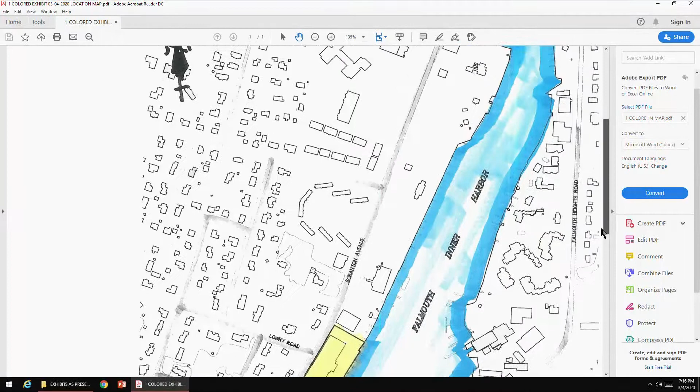So what I propose to do is go through the exhibits, because that's the best way to describe the work that's being proposed. It's rather an extensive project, basically rebuilding the waterfront at the Falmouth Marine and Yachting Center. The first exhibit shows a map of all of Falmouth Inner Harbor, and this is the location of the project we're proposing to do the work. It's owned by Falmouth Holdings Company, called Falmouth Marine and Yachting. So the notice of intent is extensive, so the first thing we ought to do is

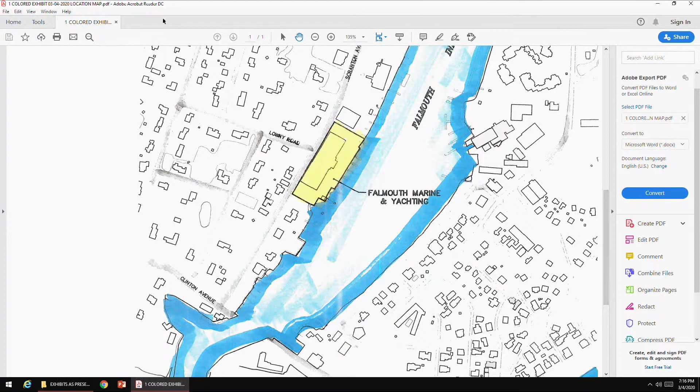look at the existing conditions. Scranton Avenue is on the top. North is generally... this one doesn't seem to have a north arrow, but all the others will. This is Falmouth Inner Harbor. So what exists today is a very long building, the main building. There's a projection and there's stairs, there's very large doors here. There's paved parking, there's a paved driveway, there's shell parking on this side.

There's a concrete pad that's underneath some shells and gravel, then there's shell parking all the way around. Along the waterfront, there's an existing pier and float, then there's a float system with a bunch of dinghies stacked on it. There's the ticket office, there's a substantial pier including a large crane, then there's the travel lift pier with two arms. There's a ferry service that goes out to Martha's Vineyard that ties up here, and then there's a fixed pier here, a fixed pier here, and then floats.

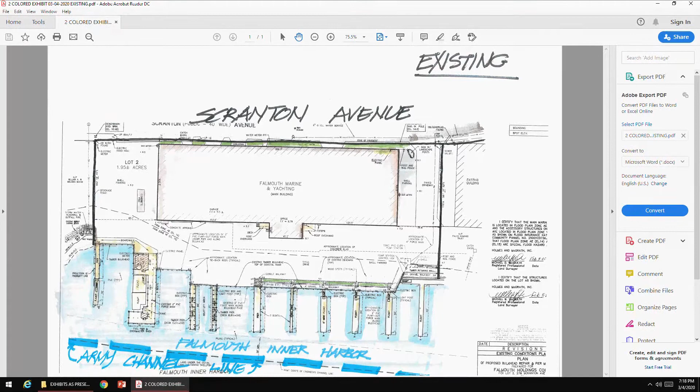And while we're replacing it, there's this old timber bulkhead, and we're going to do work on the proposed timber bulkhead. So what I've done now is I have another exhibit that shows the proposed work.

What we're doing is we originally filed a slightly different plan, and the harbor master asked us to move certain of the float extensions at the north end back. So this is a revised plan that shows them being revised, so they all line up.

Before, they were coming very close to the Corps of Engineers 30-foot offset. The Corps of Engineers dredges this, and when they dredge it, they have established a channel line, and says no new structures can lie within 30 feet of it. So the harbor master has given a positive referral, and asked that it be conditioned that no tied-up boat projects into within 30 feet of the channel line, which is a suitable condition.

So this is the proposed work, and we are reconfiguring the floats. I'll show you a graphic that shows we're decreasing the amount of floats and structures in the water, even though we're adding a slip.

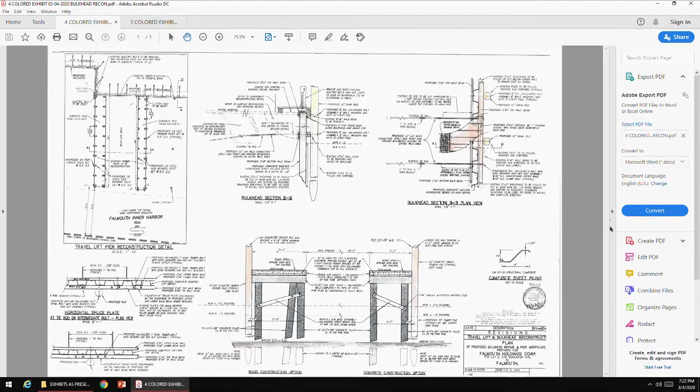So we'll talk some more about these issues when we look at the future work.

This is another cross-section. I talked about the drainage. When you build any project that involves a commercial site, you have to publish a stormwater management plan, and we've published one. As I said, this is the new vinyl sheeting, this is the new walkway that's going to be constructed, and landward there's going to be basically a gravel trench with some sand in it, a special, well, it's basically Title V sand.

Then there's another collection layer, and we show that every 20 feet or so there's a 4-inch pipe going out. So the proposal is that surface water comes in here, gets filtered out so we remove total suspended solids and things like that, and then the water would be discharged over the side into the harbor.

Now, there is a wash pad on site. What's a wash pad? I'm sorry.

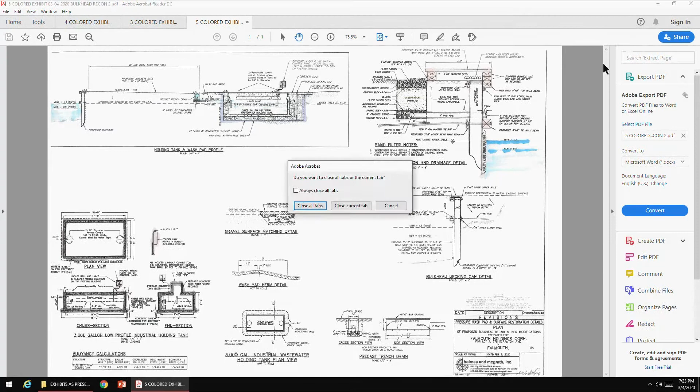DEP has now published standards for work. Let me go back to this -- when you have a travel lift now, you're supposed to install a drainage system. The drainage system here is that there is a reinforced concrete pad.

It's constructed such that all the runoff that falls off the boat goes into a trench grate located right in here. The trench grate is connected to a shallow, basically sealed tank. We have identified the size as a shallow 3,000-gallon industrial wastewater holding tank.

So what happens is the water comes in and fills this tank up. The department requires that this be taken and disposed of at a treatment plant. Whenever it reaches a certain level, they will call and get it pumped. These manholes will be sealed during rainstorms, so we're not pumping rain. So there's the details of the industrial holding tank we have to put in.

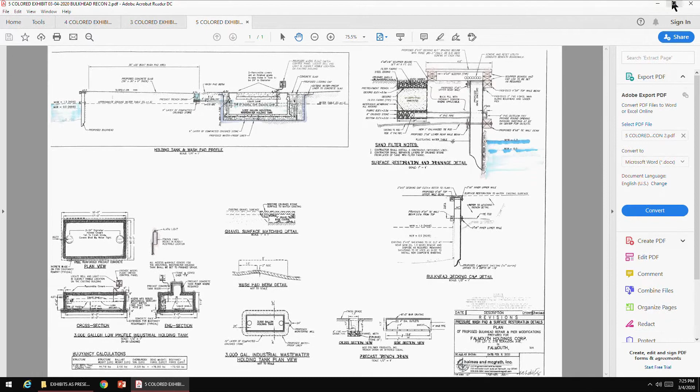And this is the wash pad I described. This is the walkway I described, and it goes all the way along. There was a ticket office that was used before, and now it's going to be built in this location. This is a brand-new structure.

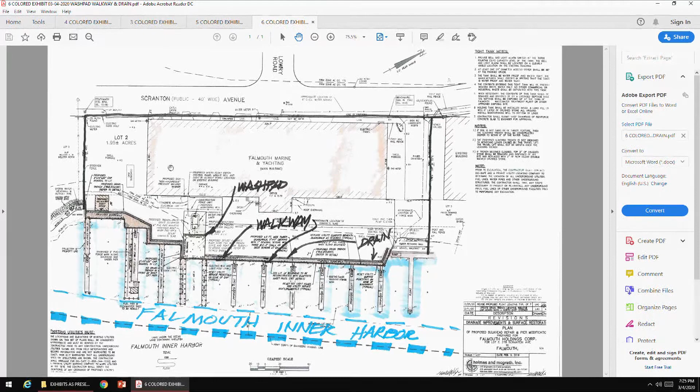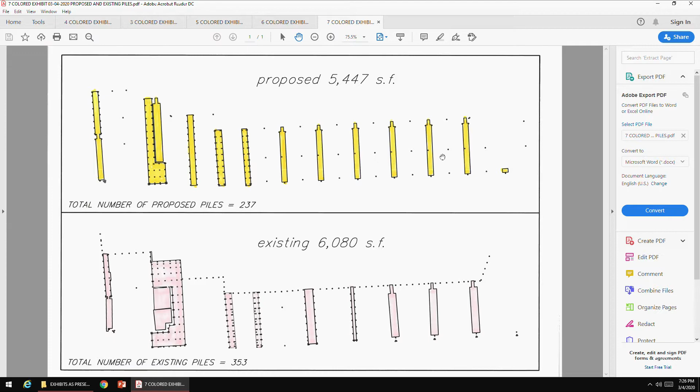We do have one additional slip that's going to pay for all of this. It's quite an expense for this facility, which is quite old, to say the least. We did file a stormwater management plan with the commission that describes how we meet the state standard. So I believe this is a suitable project that can be readily approved by the commission, and I'm ready to answer any questions you might have concerning the design. Thank you.

Mike, what are the differences between the 2008 approval you got for the same project and now?

Well, remember the reconfigurations of the floats. The first thing is that the 2008 approval is long expired. In 2008 it was said that as long as we reduced the footprint and reduced the piles, it was a suitable project, and there was an improvement in the material of the pilings, because the piles out there are basically the old ones that have creosote in them, not tar, but an asphalt-type creosote.

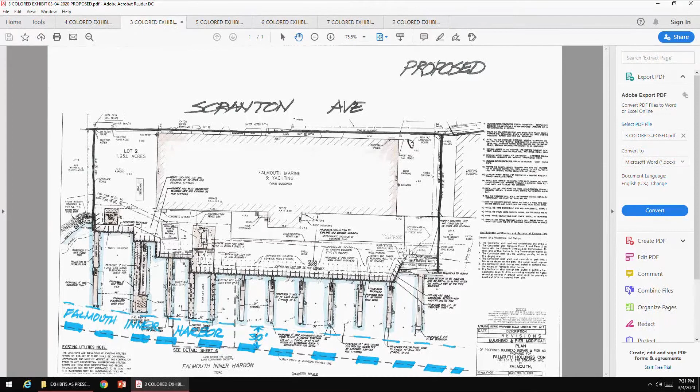Courtney asked: the existing tie rods are connected to dead men? Yes. Where are those located? If you look at this graphic, it shows the approximate location of the existing dead men, taken from the license plan. The dead men are a substantial distance back, nominally over 20 feet, though setback depends on the depth.

Are the tie rods in good condition going back to them? If they're not in good condition and the contractor tells us, we will have to install a new tie rod from the bulkhead back to the dead man. Okay, I have no other questions.

Kevin asked: I'm sure there'll be some restrictions while you're under construction, so that you're not just protecting the harbor, but you're protecting Scranton Ave. There's a time of year restriction anyway, but you're also going to have comments on the fact that there should be some drainage out in Scranton Ave, and you don't want the construction to be affecting the drains out there.

If you look at the plan, there's a construction limit fence in good condition. So are you saying we need to put something on the catch basins? I think you're gonna get a comment on that. Well, there's no question that when we file for building permit, there's another review that occurs. I mean, it has a limit of work.

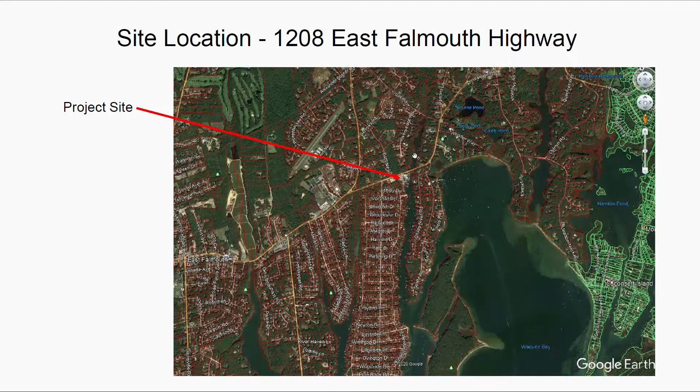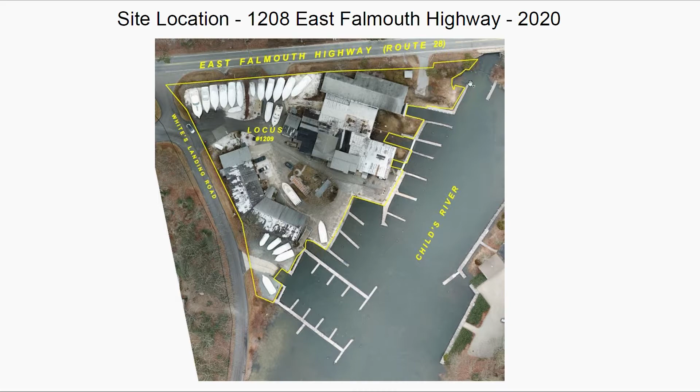You see from the yellow outline, that is the actual parcel. On this parcel we have a series of very large buildings. You'll see in this area here, that's all one building that's been added onto over the years. There's also another large building over in this area, with various improvements throughout the site. And you see all of the dockage out here - these are all the docks owned and operated by Bosun's.

Existing conditions for the site in your resource areas are land under the ocean, land containing shellfish. We did not do a shellfish study on this area - we're presuming that shellfish is in this area. This area is closed to shellfishing, and the project has been reviewed by the Shellfish Constable.

Also, there is a salt marsh area - if you look at my mouse here, you see there's actually two little salt marsh shelves right here. Those shelves were a condition of a previous permit, and those are existing salt marsh areas today with the appropriate buffer zones to them. Also on this site are coastal banks - there's a coastal bank along East Falmouth Highway that cuts across the street in that area. All of the buffer zones are shown on the plan in green as buffer zones A and B under your regulations.

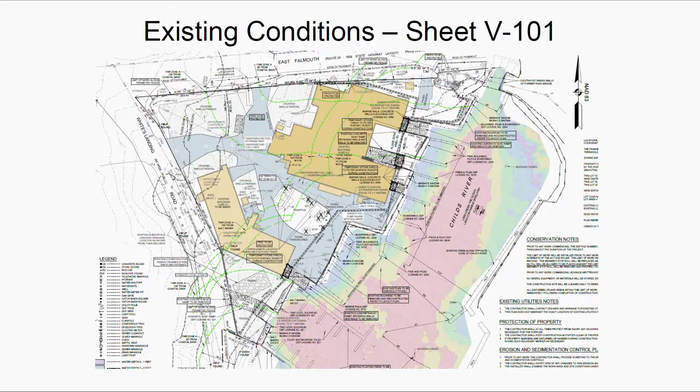Also, a large portion of the site is within land subject to coastal storm flowage. You see here's the flood zone boundary in this area here. And that covers it for the resource areas. Oh, this is also a fish run. I knew there was another.

Just some quick project statistics before we get into the plans. The area of existing buildings - we have 28,000 square feet of building area. We're gonna drop that down to 6,000 square feet. A serious reduction in building area.

We have existing 48 slips, 2 moorings. We're gonna be going to 49 slips and removing the 2 functioning moorings. The existing pile count's 353. When this is done, there'll be a reduction to 237.

Your net change in your buffer zone areas, your net change in development within the buffer zone areas is gonna be a negative 6,700 square feet, and I'll show you how we get there. We're actually gonna create new resource area here - new area of land under the ocean, 4,000 square feet of that area, and we're gonna be relocating the salt marsh areas that exist.

The proposed project includes the commercial building located in the center, surrounded by parking areas with various improvements along the shoreline and complete reconfiguration of all the docks. Also, as part of this proposal is dredging, and I'm going to go through each step.

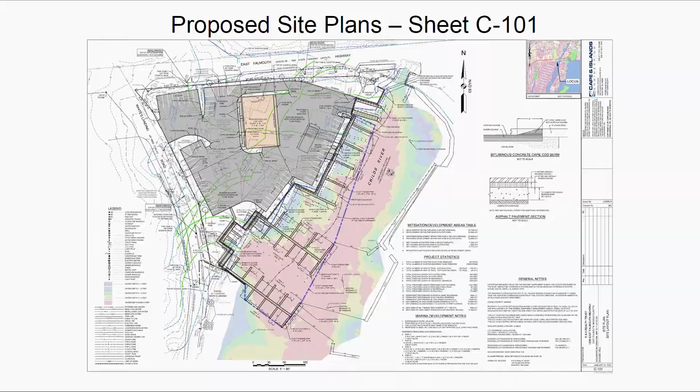For our upland site work, we're going to be constructing the new building and the new parking area. There will be a wash pad here. This wash pad will have a recycling system that will function to capture and recycle the wastewater, which will then be removed from the site as necessary. It's the same type of system that Bosun's uses at their other sites, and this is very similar. We're in the middle of construction at the Mashpee Neck Marina, and this is a very similar setup that's being used over there.

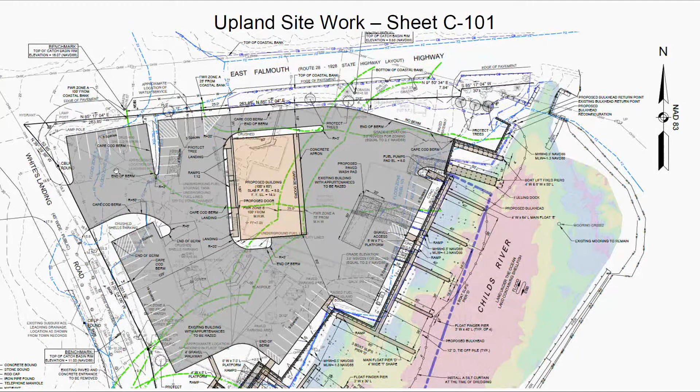The entire parking lot will be rebuilt. We're gonna grade this parking lot so that we catch all the runoff from it. And once we get to the stormwater management plan, we'll show you how we're dealing with some runoff that's coming from East Falmouth Highway. We're gonna utilize the existing leach pits that are up in this area, and we'll be connecting to those and installing new septic tanks.

For our shoreline work, we're going to rebuild all of the bulkheads and change the shoreline. I have another plan that clearly exhibits that for you. But in this case, we're gonna be doing all new bulkheads along the complete shoreline of the marina, and then a series of fixed piers and floating piers installed along with those or afterwards. There will also be a travel lift installed over in this area.

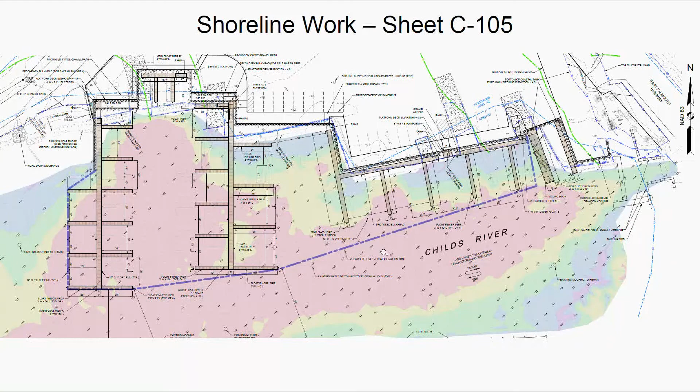One thing I didn't point out is if you look on our site plan, you'll see the bathymetric survey that was done, and it's color coded so you can see where the depths are. Those depths are all based from mean low water. There are various details on the plans with specifics on the bulkheads and things like that, and I'm not gonna get into the details, but if you have any particular questions about them at the end, we can go over those.

This plan right here shows some of our site utility layout. You can see first that the building's being connected to a septic tank and a pump chamber that would then be pumped up and leached into the existing leach pits.

We have a series of drainage structures on the site that will capture both roof runoff from the structure and runoff from the pavement in the front of the site. And in this back portion of the site, we're gonna slope the entire site over into a drainage swale, and that drainage swale will have an overflow for when necessary, where it would discharge into Childs River.

Right now, just about the entire site discharges into Childs River. Also, we have a large amount of stormwater that actually comes off of Route 28. We have started discussions, and we're gonna be trying to work with Mass Highway to get them to make some improvements there. But in our design, we're planning on those improvements not happening for a long time.

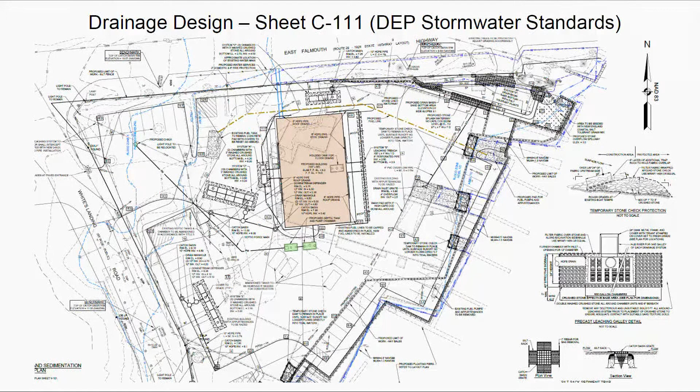This drainage swale is gonna act both to capture the stormwater and treat it prior to discharge, and act as a reserve capacity, so there is a standing water level in there. The water level will be able to rise in hopes that we'll get as much leaching through the drainage swale as possible and reduce the amount that needs to spill into Childs River. In any event, all stormwater that would enter Childs River will now be pre-treated, which is a significant improvement from the existing conditions. This design is in accordance with DEP stormwater management standards.

When we complete all of the work, we'll be landscaping the site. There's gonna be an area along the highway where we're gonna landscape with native grasses. It's an area highly exposed to a lot of debris coming off the highway. The grasses do really well for stabilizing the sides of highways, and there's a pretty good slope there too, so native grasses are a really good fit for this area. We're gonna put a couple of native trees over there as well.

We're gonna be using a New England coastal salt-tolerant grass mix for the drainage swale, and a mixture of grasses and a native thorny shrub that will run all along the edge of the parking. That will act as a stabilizer for the slope, since there was a slope transition there, and the thorny shrub we chose will hopefully discourage people from cutting through in those areas.

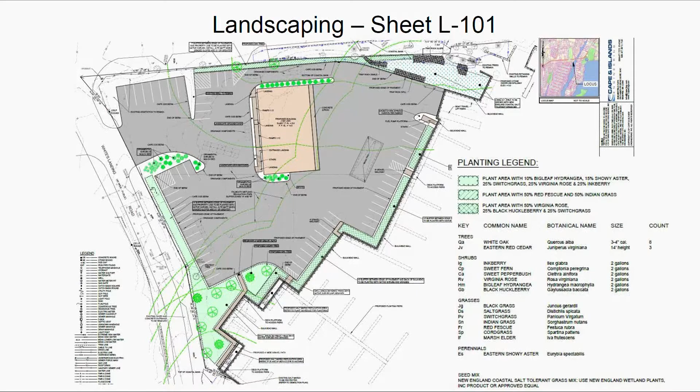Over in this area of the site, we're gonna replant with native shrubs. Mixtures are all called out on the plan, along with native trees, and we'll carry that up along the property line in this area here.

We believe the project exceeds all applicable performance standards, as we have articulated in our narrative.

The existing site is located within a marine zone district. It's been historically used as a marina for many years. It has all the appropriate permits in place, and is in need of repair. I think if you've been to the site, you'll see that it's far from its former glory, and it's time to do something.

The project, when completed, is gonna have a net reduction in developed areas. It's gonna have major improvements to stormwater management, an increase in resource areas, an increase in natural vegetation, and an improvement to navigation. So this is really a win-win.

So with that, we respectfully request you would issue an order of conditions, and we're available to answer any of your questions. Thank you.

Yeah, a couple of things, Matt. You're redoing your whole bulkheads, right? Obviously. Are you going in front, or just reconstructing the whole front? Are you reusing any of the bulkheads, or are they all gonna come out? They're all gonna come out.

Okay, when's the last time the site was dredged like that? Do you know the last time? There's a project, I don't have it off the top of my head, but there's a section in our narrative for project history, and that should be listed there. It shows all of the permits. I was just trying to find that real quick, I never read it. Okay, exhibit six has a history page.

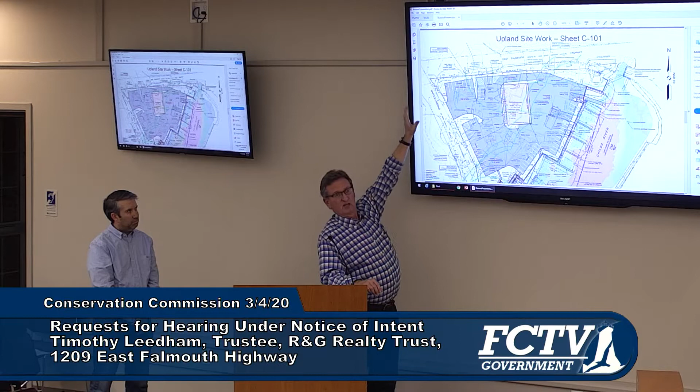So we've already gone over, and this is all completed. As part of that, if you were out to the property, you'll see that there's new fencing in there, there's new gates, the entrance is wider. It can handle big tractor trailers with boats. So we're all set in that regard. We won't be coming in and out off of 28. Everything will be accessing from White's Landing Road.

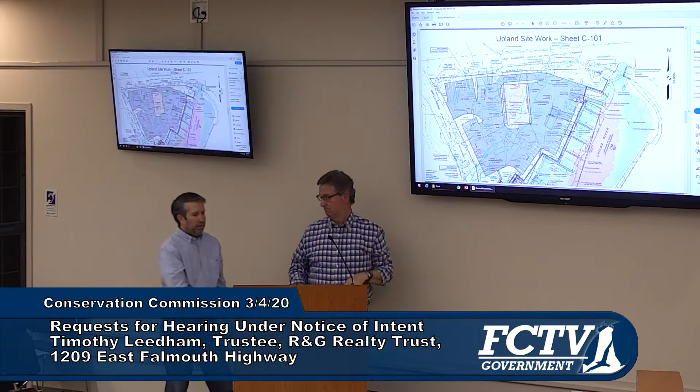And I can better answer the question. Raul pointed out to me that there's actually another area on the site that we'll be using. And we put a gravel wash pad here because this is where the existing boat ramp is now. So trucks could pull in here and we could demo this building and then remove it from the site. There may be some trucks leaving from this area here too. But we did figure in a wash pad for washing the trucks down before they leave.

Is there any way that area is gonna be kind of protected from washing those trucks down? And have you put a limit of work surrounding it with sedimentation control?

Okay, and that's another thing I didn't point out - this plan shows what we're doing for sedimentation control. And we actually do carry all of the town's notes that were given to us from the engineering division for site controls and erosion controls.

We're gonna be putting in some stone check dams right away in these areas, because these ramps run into the building. And then these buildings, we're looking to get down right away. If you've seen them, you know this one's gonna start coming down if we don't take some action. So we're looking to get them down right away. Once that opens up the site, we're looking to have any trucks carrying materials leaving here accessed through here as well.

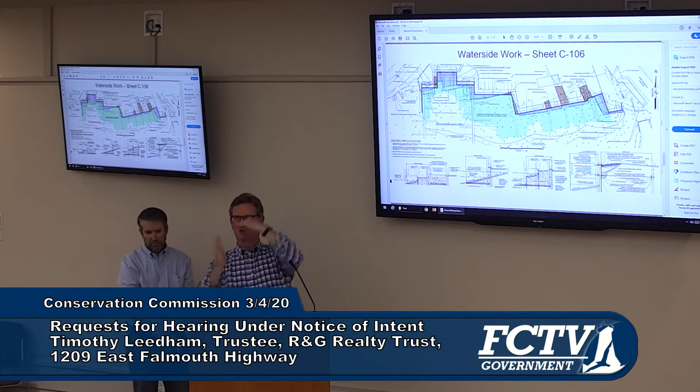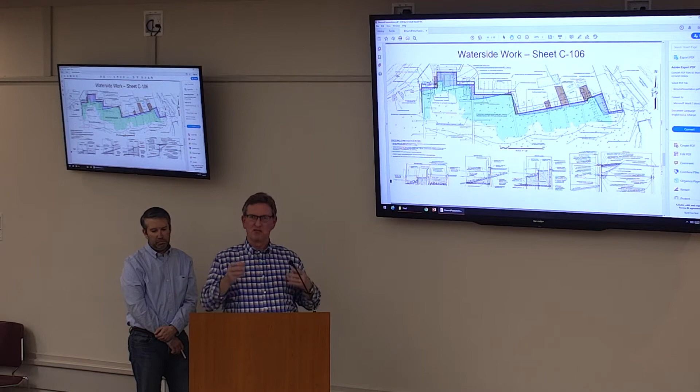You had a wall and a wall going all along the waterfront, same with the buildings. We're trying to, within the scope of what's reasonable, simplify it, clean it, and give it the right bones. Decluttering, making things work correctly. It's not a big apartment complex, nothing like that. We're just trying to give it the proper bones, as if it were all conceived of today at one time, rather than being pieced together over decades and decades. So that's the message, and they've done a great job putting all those pieces together.

I have a question and a comment. The harbor master requested 4 moorings be removed. You're removing 3, is that correct? Yeah, we're keeping one as a channel marker, which he confirmed would be okay. Let me get a better plan for you. This guy right here, they actually don't tie to that. They use that as a marker, literally as a channel marker. So the harbor master suggested maybe changing it from a mooring ball to something else, which is what we'll probably do. But you're forfeiting 3 others. Correct, that's the improvement to navigation. We're gonna open that area up. Working with them, that's good.

That's tight in there. And just, I don't know if it's more of a question or a comment about the road runoff. In your narrative, you state, or somewhere I read it, that in your calculations you've included road runoff. Is that a fair assessment? You've allowed for that volume, I guess - I know it's not your problem, I'm just noting what I read.

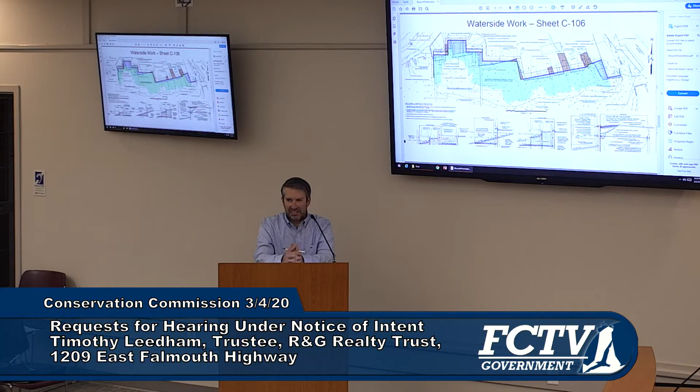Anyway, it's gonna be a great project. It's just a very large project, and we just want to make sure that the town's interests are protected.

And like I said, these reviews take a tremendous amount of time from our engineering department, and the practice is going to be moving away from putting the bulk of all of the committee's reviews on the engineering department and moving them to an outside consultant. And I think it will actually just result in better products for the town as well. That's all I have for now. I'll look forward to questions the next time.

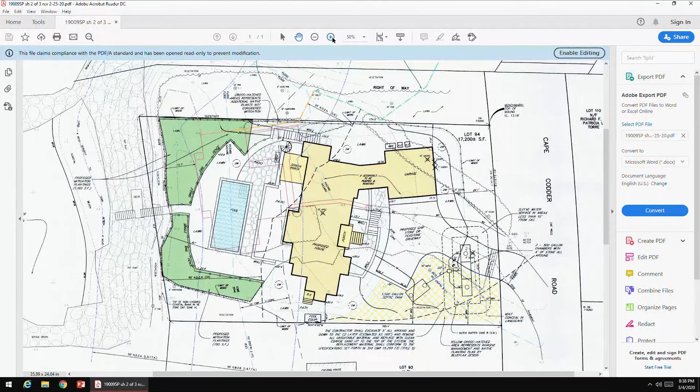We added a cross-hatched area to the southeast side of the lot. You can see it on this exhibit, the yellow cross-hatching. This is the area of outer buffer zone B, where we're proposing to remove some vegetation to allow the project to proceed. It's the area that was reviewed by Blue Flax Design as far as the value of the plant material and its wildlife habitat.

There's a report submitted that, I'll just paraphrase, concludes that there's a very low value to that area. In fact, it's effectively historically landscaped areas that have become overwhelmed by invasive plants.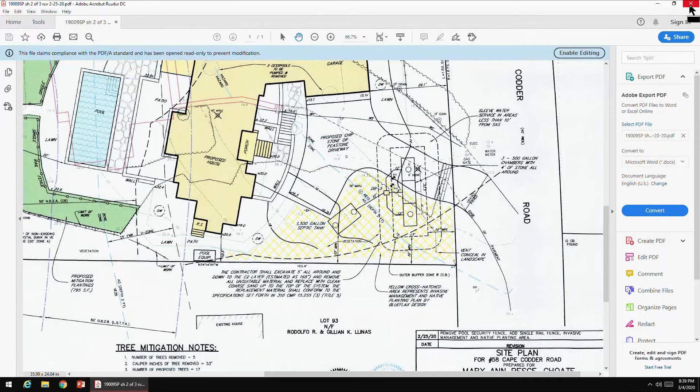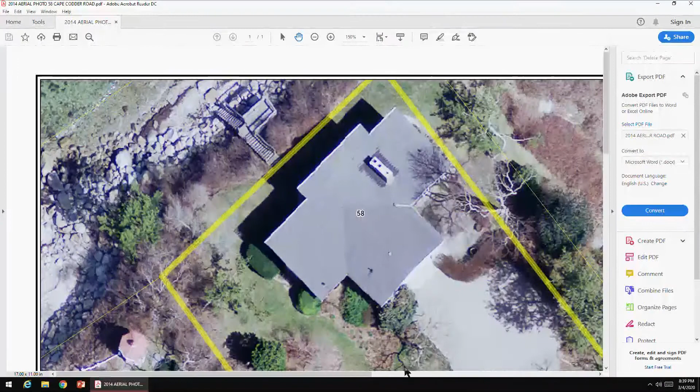And the aerial photo I just provided to you exhibits that. I think if you look closely, and I'll put it up here, you can see if you zoom in to this area, the leaves are off the trees when this aerial was taken, thankfully in 2014.

There's a stone footpath that meanders through this area. There's a circle you see here - this is a bird bath that's still there, but it's all invaded by vines. You can see very organized landscaping here, some lawn areas, and they're all under the canopy of this large tree. So that illustrates what was there in 2014, and it's only gotten more invaded by invasives.

So the report by Blue Flax Design goes into more detail on that. But I thought the aerial was kind of telling in what's the situation out there.

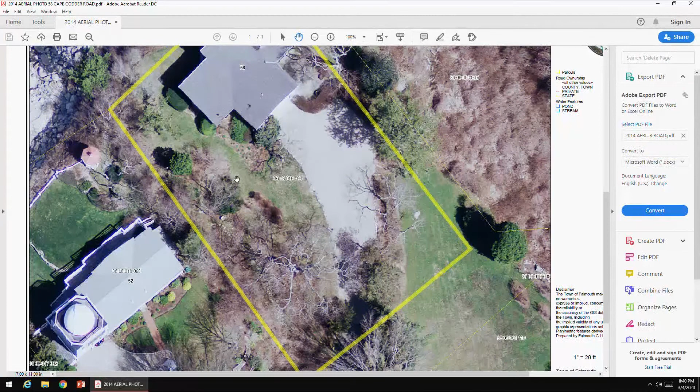Also realize that this area, outer buffer zone B, is sort of an island of overgrown vegetation that isn't connected or adjacent to any wetland resources. They're more to the west and northwest. In fact, the existing house is between that island of vegetation and the waterfront.

It's in a wetland resource, it's in a buffer zone - that's a wetland resource, right, but it's defined by our wetland regulations. Okay, that's fine, then let me clarify: it's isolated from wetland resources such as coastal beaches, coastal banks, land under the ocean. It in and of itself is a wetland resource, yes, but it is in outer buffer B, a landscaped area with invasive vines and things like bittersweet in it. I'm not gonna get into the detail on that, but I'm just trying to explain to you the value of it.

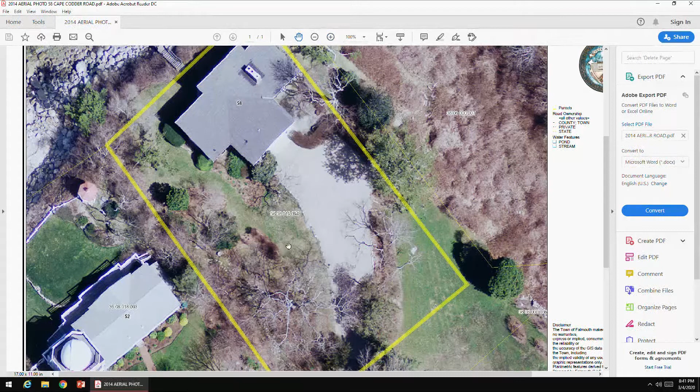We also provided to you a more comprehensive supplemental construction methodology. Commissioner Byrd had some questions about access to the waterfront if the building foundation has been constructed, and we outlined in a letter the methods that would allow for the materials to still be delivered.

There's about a 10 or 11 foot space between the building and the equipment that would be utilized to deliver materials to do the installation of the mitigation planting - like a skid steer, a Bobcat type machine that would probably deliver plants and other materials either on pallets or just in groups of plantings around, and then the mini excavator or other piece of equipment would excavate the holes for all the planting material.

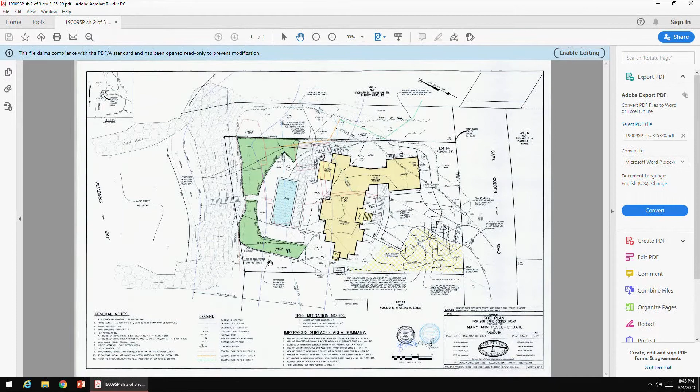We actually consulted with George Patello, who happens to be here for my other project, who is one of the potential site contractors, about how that work would be done, and he confirmed that it would be the way to do it, and that there's adequate access.

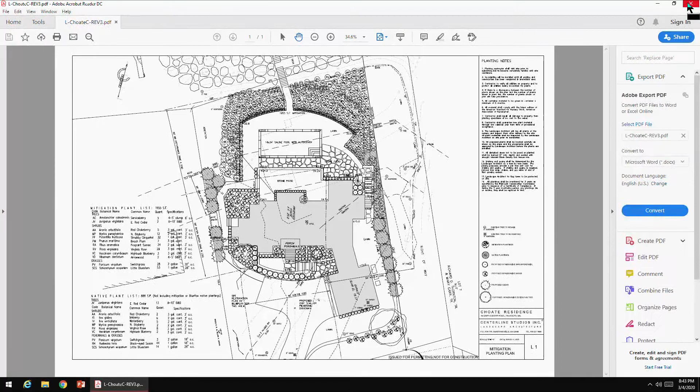We also submitted a revised mitigation plan that Centerline Studios prepared that addressed some of your issues and concerns. But I think what I'll do first is turn it over to Teresa to talk about that vegetation in the outer buffer B zone. I have your plan here.

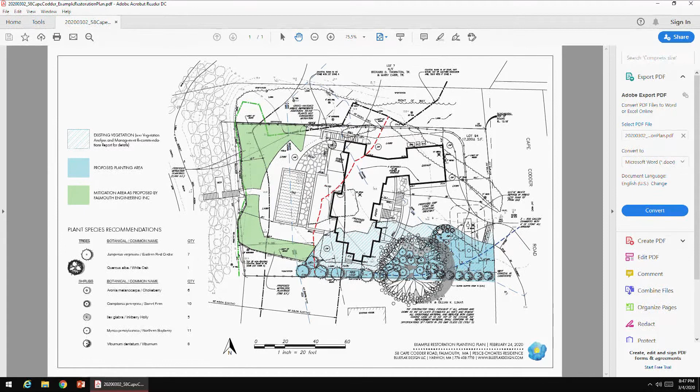On page 7 of our land management plan, we make recommendations for management protocols. We propose and outline recommendations for removing the invasive vegetation, particularly that vine material be treated approximately 3 to 5 weeks before any clearing is done on the site for construction to happen. There's some follow-up management planned in that area if the goal is to return it to a naturalized area without management.

We recommend that woody vegetation be restored with a mix of canopy trees and shrubs, and have given as an outline for recommendations eastern red cedar, white oak, arrowwood viburnum, black chokeberry, bayberry, inkberry holly, as well as some sweet fern to go into the areas directly abutting the proposed leaching field up in this area.

This is an example. It is not meant to be a mitigation plan, just an example restoration planting plan, meant to be a supplement to the plan that was provided by Jen Malila.

The recommendations for these species, most of which are considered keystone species, were provided to improve biodiversity and wildlife habitat within the buffer zone while also protecting soils and supporting ecological services.

On page 8 of our report, we give an example of the different species we are recommending and the different habitat value that they provide, as well as resources for those.

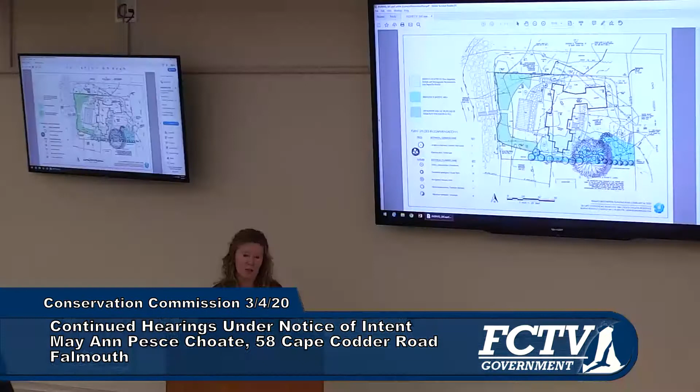Well, why not propose restoring those too? That was outside of the scope that I was asked to analyze. I'm saying it to Mike.

Frankly, we're petrified to touch an A zone. That's an A zone, I'm only proposing to do work in the B zone. I didn't think we could do anything in an A zone. You certainly can do restoration of habitat in the A zone.

Excuse me, one thing, Mike, don't tell us you're scared to death of doing restoration in the A zone. All of your restoration on 8 Bridge Street was in the A zone. Chairman, well, I guess we're missing the point here. You have very specific labels, no disturbance zone A. Have you done any restoration projects in buffer zone A?

You don't have to say who you might have been working with as an engineer. If I could, Commissioner Gladfelter, I have two.

We hear mixed signals on what to do in an A zone. We didn't need to touch it, and I just heard you say it makes good cover, so we thought no disturbance, if you don't need to disturb it, don't disturb it. Basically, you're eliminating 50% of the buffer that was there, that's gonna be gone with the expansion of the house. So you are providing some mitigation planning. This is all buffer, whether it's in the A zone or the B zone, it's all buffer zone vegetation. So I would suggest you add to what you have and restore that corner, so the whole area is gonna be better for the area of mitigation.

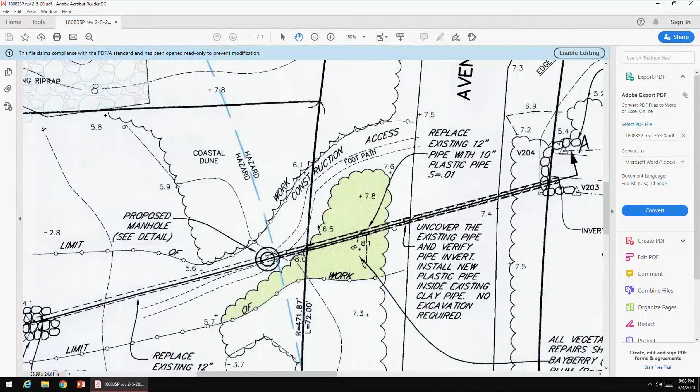The excavation we were already proposing to do would still be done, but when we excavate on the west side of the road, it'll give us an opportunity to feed this plastic pipe through. It's a flexible pipe, similar to a gas main pipe, the yellow gas main pipe. It's very smooth plastic and flexible, and the equipment George has can push it through the pipe to the other side without doing any further excavation.

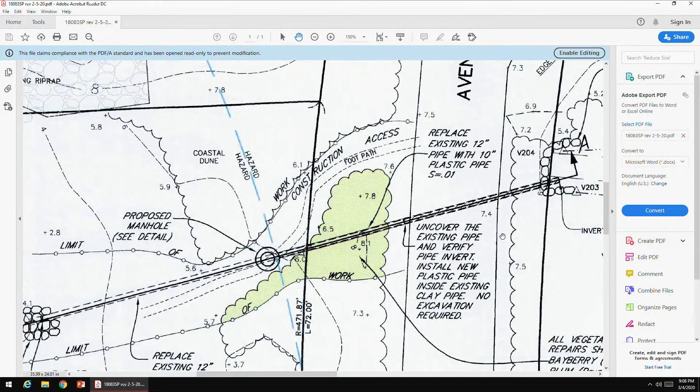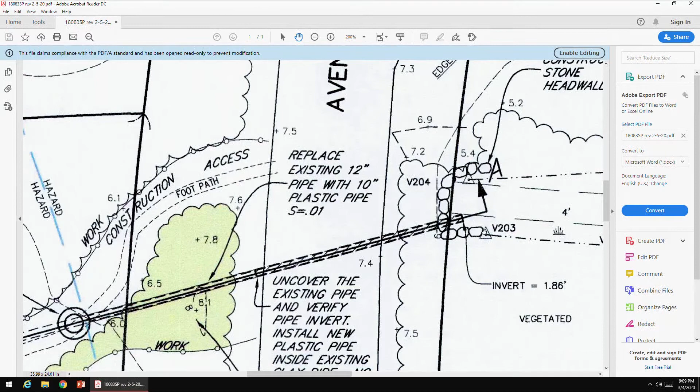We also noticed on the east side that there's some slumping and erosion around the existing pipe, and we were asking if we could install a small stone head wall around that inlet side of the pipe while we're doing the rest of this work, just to stabilize the shoulder of the road and prevent any more erosion into the ditch. That's the amendment request. Happy to answer any questions, and George is here to answer questions too.

There's actually a profile on the plan too, if you want to see it in profile - the road, pavement, and the place where we're going to cut the pipe. We're going to push from this location through and underneath the road and install the small head wall.

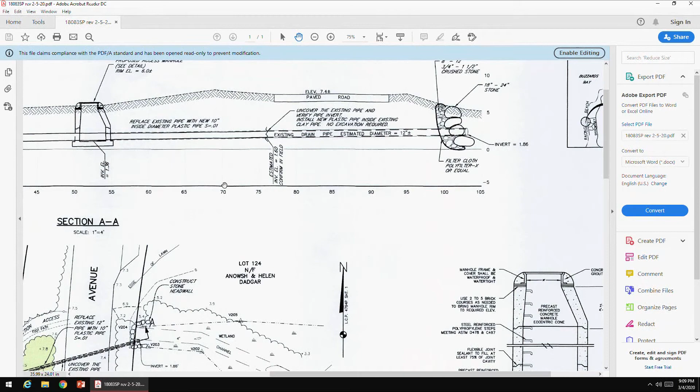Mr. Chairman, it's kind of simple - staff doesn't have any comments or concerns with this. Steve said he was expecting this and waiting for it - it makes all the sense in the world. Russ said he's good with it, no problem. All good with it. Good, glad it worked out this way.

Kevin raised a concern: the only problem he could foresee is if you had a collapse under the road at some point. It's not a heavily traveled road, but he was asking about the kind of plastic being used - whether it has some heft to it, like a Schedule 40 pipe, as opposed to a thinner plastic. It's fairly rigid pipe, similar to gas main pipe, and it's going to be pushed through the existing pipe.

George Vitello of George Vitello Excavation was asked if this is similar to what they did on a sewer main, pushing a plastic coating through. He confirmed it's the same thing - pretty heavy-duty pipe, like a Schedule 40, just a little more flexible, and it will also be going into a clay pipe. This is why the owner of the association wants to install the pipe for preventative maintenance, so a collapse doesn't happen eventually.